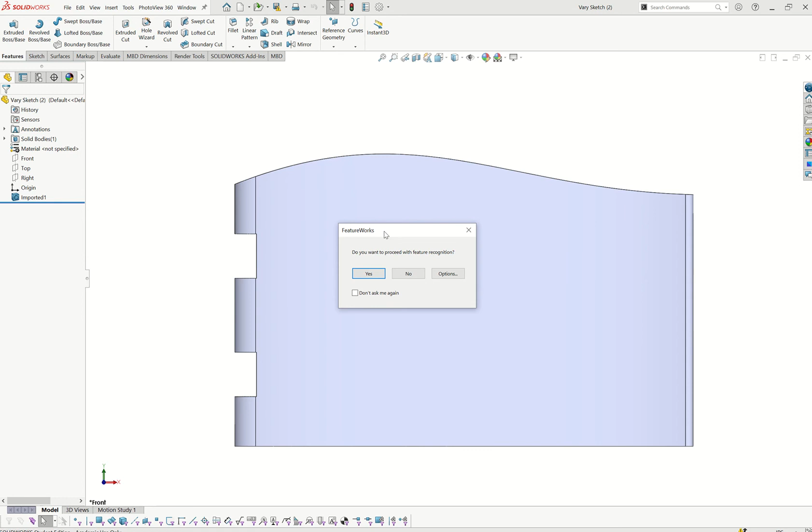Then we'll click the Configuration Manager. We'll right-click the Vary Sketch configuration and then select Add Configuration. The name of the configuration will be called With Cutouts, and then you'll hit check. And you can see there's a green check mark on this configuration, meaning this is the active configuration.

The next step is to actually create the cutout. So we are going to click the FeatureManager design tree, and we're going to select the front plane, hit sketch to create a new 2D sketch on the front plane, and then we are going to select this top edge here and hit offset entities. Our parameter is going to be 0.275 inches, so click check there.

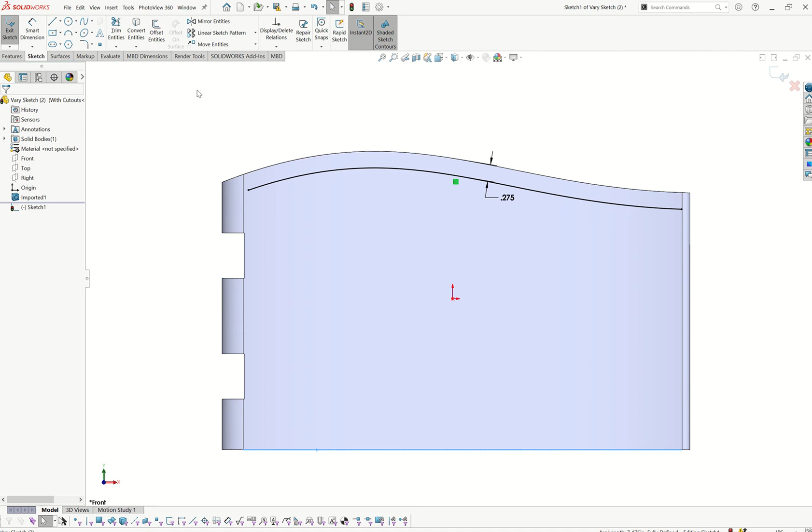And then we're going to do that again for the bottom. So click this bottom edge and click offset entities. We are going to reverse the direction and make sure that the distance is 0.275 inches. And then check. And then I'm going to select this endpoint and click and drag out here. Same here. I'll click this point and drag it out.

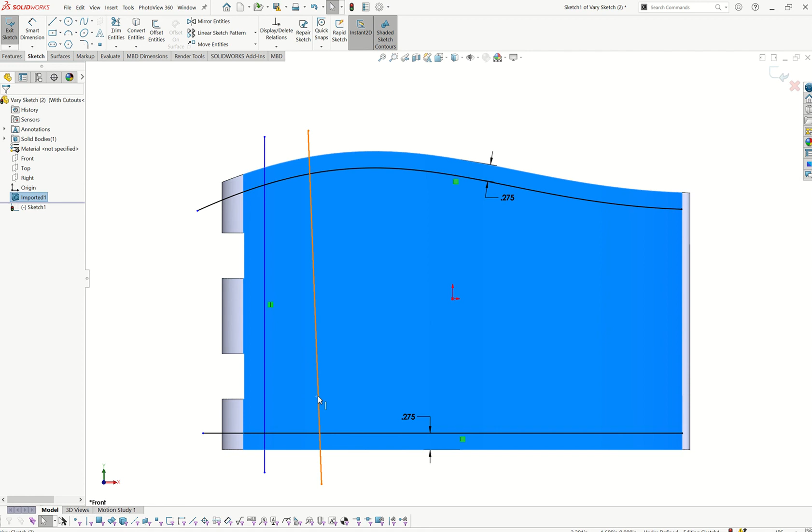And then I'll go in and draw 2 vertical lines. So click line and draw 1 vertical line. You can see the vertical relation is to the bottom right of my cursor in yellow. Then escape, and then I'll hit the line command again. And you can also just draw an angled line if you want. Escape, and then click your line and add the vertical relation just from this quick menu right there.

Now I'm going to trim, so just trim these ends off there, and then I'm going to hit escape to cancel out the trim command. I'm going to add some smart dimensions, so click smart dimension and add a dimension from this edge to this line. That dimension is going to be 0.5 inches. And then from this line to this line is going to be 0.25 inches. And then enter.

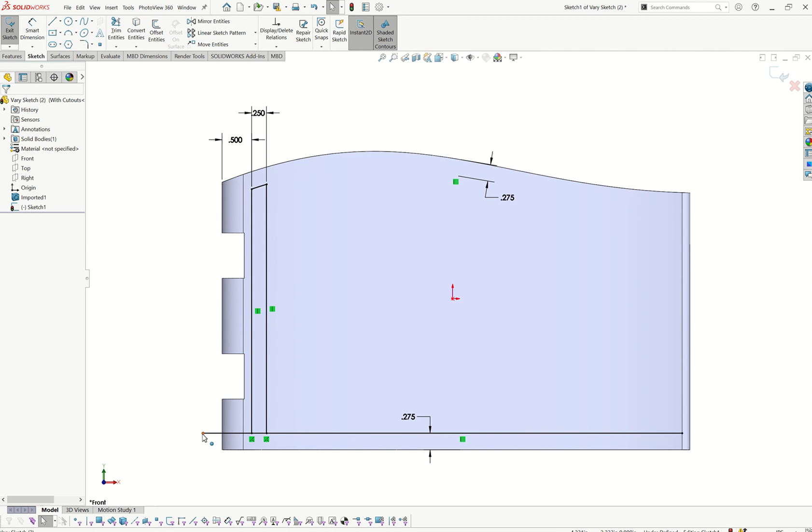And then check. When we use Vary Sketch, it is going to reference our different dimensions in here, and because we offset this from this, I want to ensure that I keep the relations correct. So instead of using trim, I'm just going to grab this endpoint right here and click and drag until you have a coincident relation between these 2 points, and then same with this side, click and drag over here. There we go. Same thing. All right. That'll make sure that when I trim, these offset distances remain the same and all of the automatic relations that were created, so that these lines follow these edges here.

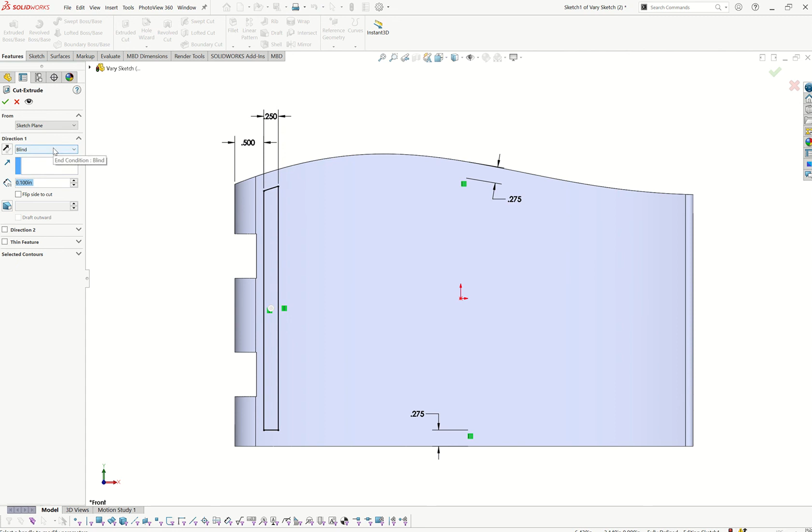Now I'm going to go to the Features tab and I'm going to hit Extruded Cut. For the extrusion type, I'm going to select through all both. I'm going to rotate, and you can see that this will actually cut through the entire part. I'm going to click check. Awesome. And then I'm going to hit Control 1 to bring this to the front view.

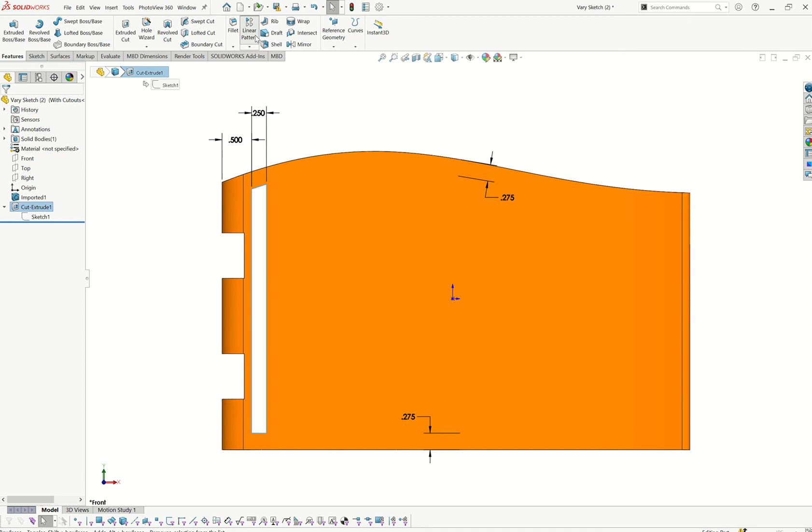For the next step, I need the dimensions of this sketch to show, so you can just double click this feature here to show these dimensions. And then in the Features tab, click Linear Pattern. For direction, you're going to select this 0.5 inches. And then for the distance, this is going to be 0.5 inches. And the number of instances should be 15.

For the feature, make sure Cut-Extrude1 is selected. If it's not, you can expand this and click it there. And then on options, you want to select Vary Sketch so that it has this shape right here, and then click OK.

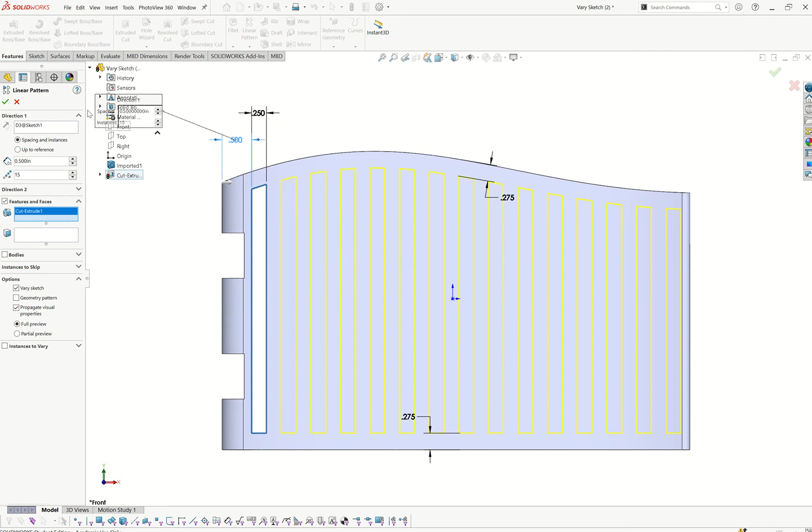And just to make sure that this was the correct configuration, if you double click on default, you can see that this was our original part, and then double click on the configuration called With Cutouts, and this is our new configuration. And then make sure to save this and submit in Canvas.